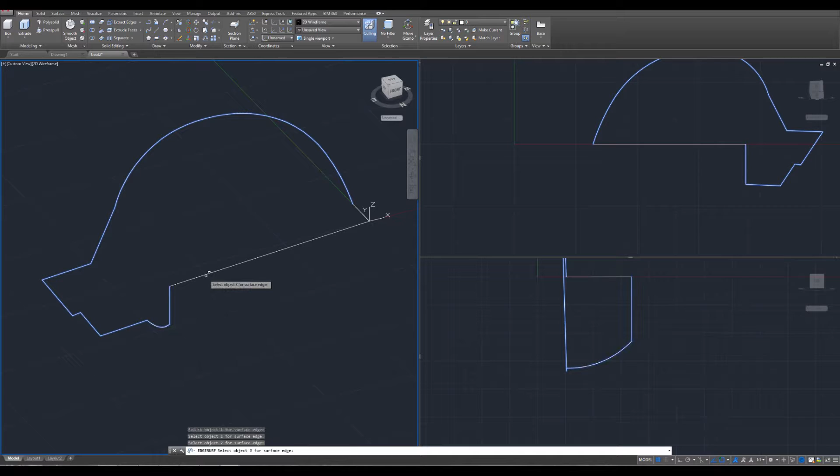We're going to use the edge surf command. And I'm not expecting it to work the first time, but let's go ahead and see. 1, then our second line is that, our third line is this, and then our fourth line would be that.

Wow. Okay, and I spoke too soon. There you go. You can see what it did. It pretty much wrapped a blanket over that surface, and that's looking pretty cool right now. So let's go ahead and see if we can mirror that.

Okay, and to use the mirror command, simply head over to your right view. We're going to need some kind of reference line, so I'm going to use the line tool, line, enter, and draw in a line from the top of it, a relative top to it, to the bottom. And then I'm just going to kind of continue it just a little bit using that reference so you can kind of see where the midpoint is.

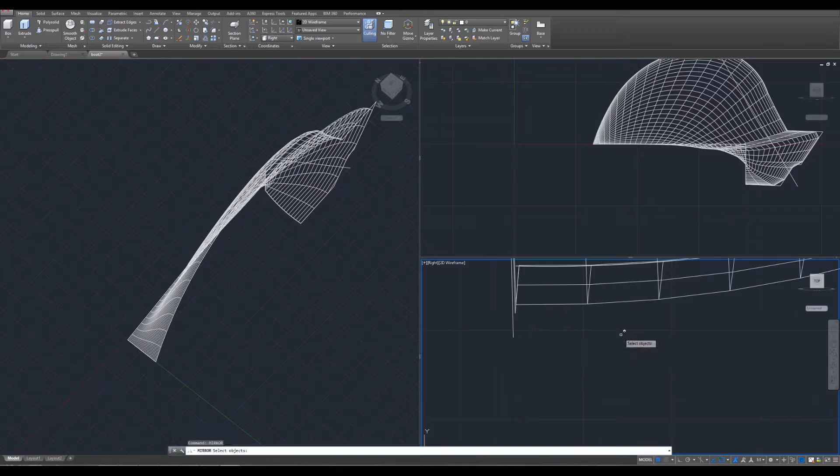Then I'm going to use the mirror command, enter, select this, enter, and then use this line as my reference. So I clicked on the bottom. Now I'm going to click on the top, like that. And I'm not going to erase the original.

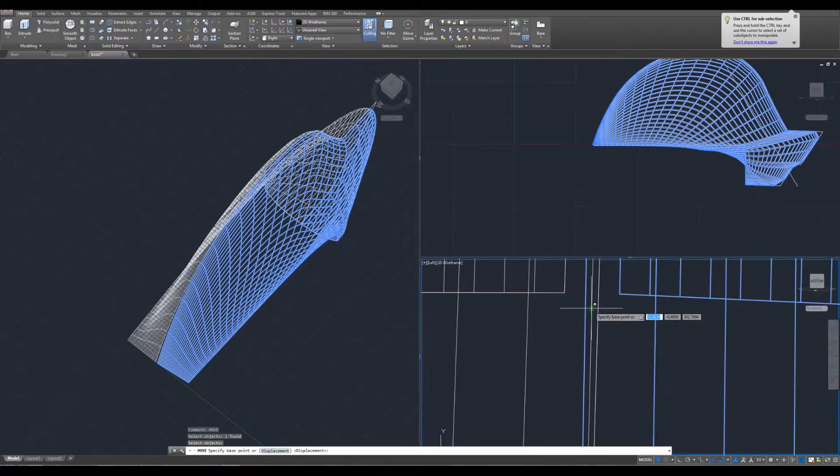And there we go. We can see how it looks. It does kind of look like there's a little bit of a gap to it, which is totally fine. I'm just going to look straight at it like that. Then I'm going to use the move command, enter, select this object, enter, and then I'm going to grab it from this point and move it over to that point. Okay, so I just moved it into place.

Now that's looking good. And let's go ahead and turn on the rest of the hull and take a look. Cool. Awesome. The only thing I notice is that there's a slightly larger gap on this side versus that side.

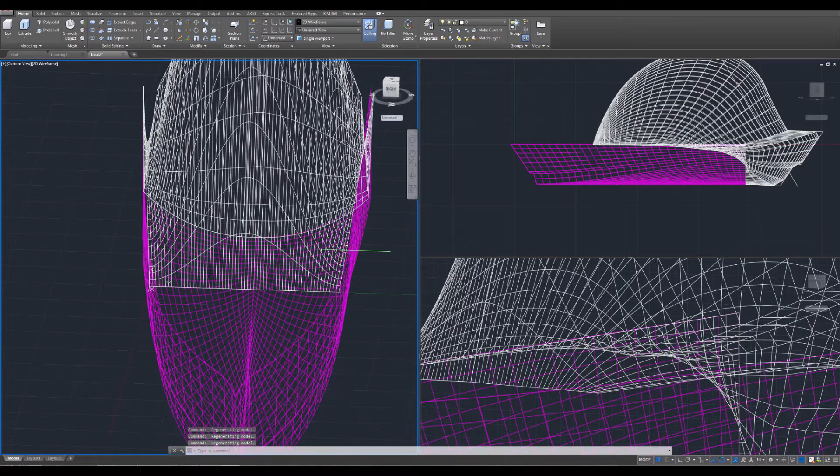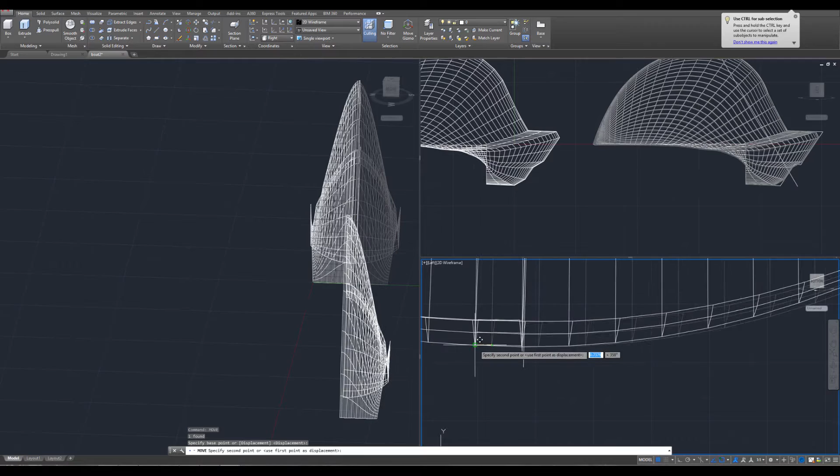So, if that is something that's bothering you and you want to change, just turn off the hull, go over to this view once again so that you're facing right at it, and then find something you can use as a reference. So I'm going to select that, use the move command, enter, and then I'm going to select that point and move it over to that point, or move it closer so that it matches up the way you want it to match up. And then turn it back on, see how it looks, and move on, so on and so forth.

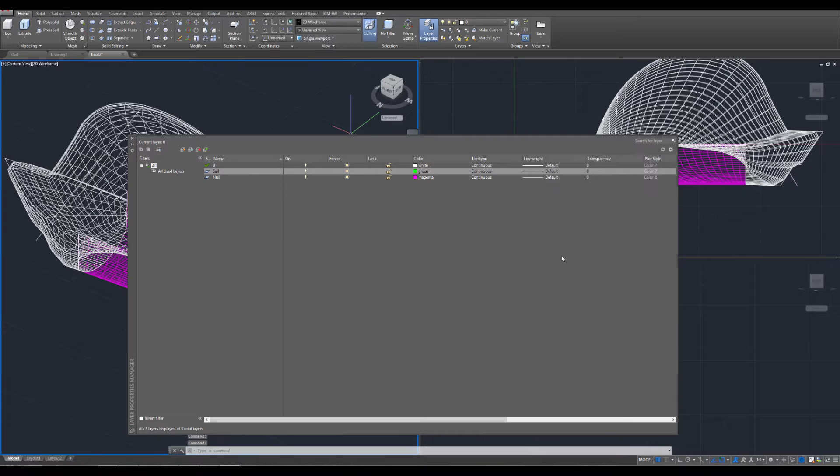Okay, and the last thing we need to do is add in the top deck of our boat. So let's go ahead and do that. First, let's create a new layer by heading to Layer Properties, right-clicking on this open space, New Layer, and let's just call this Sail. That will be the top part of the boat. I'm going to change the color to a light green, press OK, and then close out of that, select that, and switch that over to the sail part. So it looks like that.

Once that's been selected, go ahead and turn it off, because if we're just drawing the top deck of the boat, we don't really need to see the sail at that moment. And let's also grab the XYZ, hover over the center, switch it back to world view, and once it's on world view, click on it again and move it over to the center of the boat, like that.

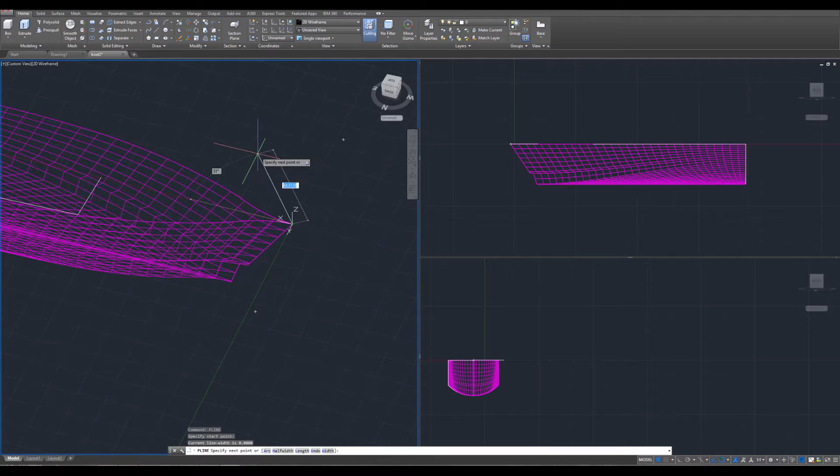Okay, that's looking good. Let's go ahead and do this. We need to draw out half of the boat. We're going to use the polyline tool, P-line, press enter, and then start by clicking on the top of the boat. I'm going to look at it from a top-down view, right-click, go to arc, right-click, go to second point.

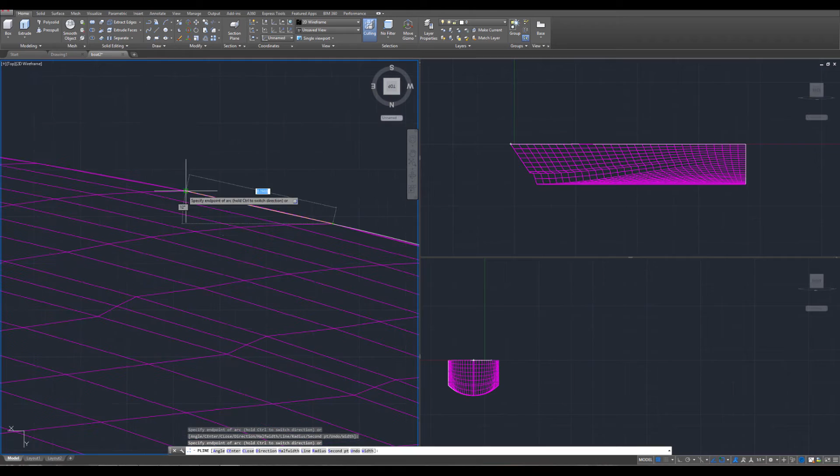Now the closer you are to hitting each of these vertices, the more smooth the shape of the boat's going to be. So you can see I'm kind of hitting every single one. It's up to you if you want to go through the entire thing or stop at a given point. I'm just going to make sure at least I have the top portion of the boat done.

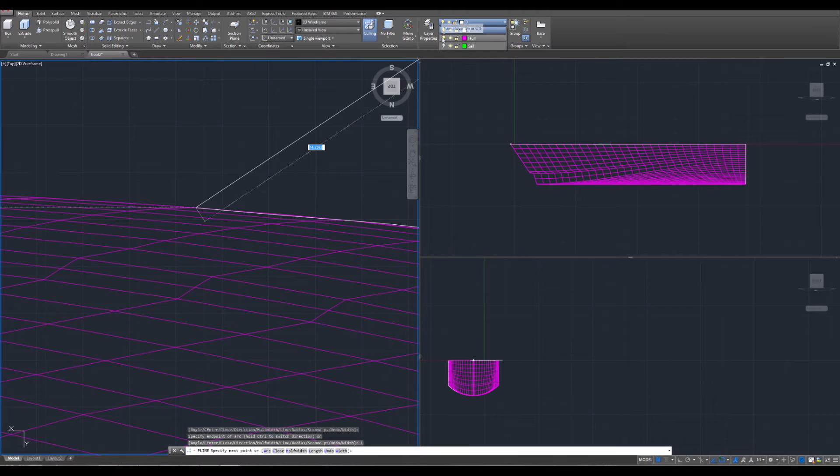Okay, so I'll probably get one more at this point, right about there. And then I'm going to right click, switch over to the polyline tool. I'm also going to turn off the hull layer, because in reality, we don't need it right now. We just need to see this part.

And you can also kind of see those were probably some remnant lines. Not a big deal, we'll get rid of those in a second. But I'm going to hover to the center point to get that tracking. And actually, I'm going to turn on ortho mode as well, so that actually helps out a significant amount.

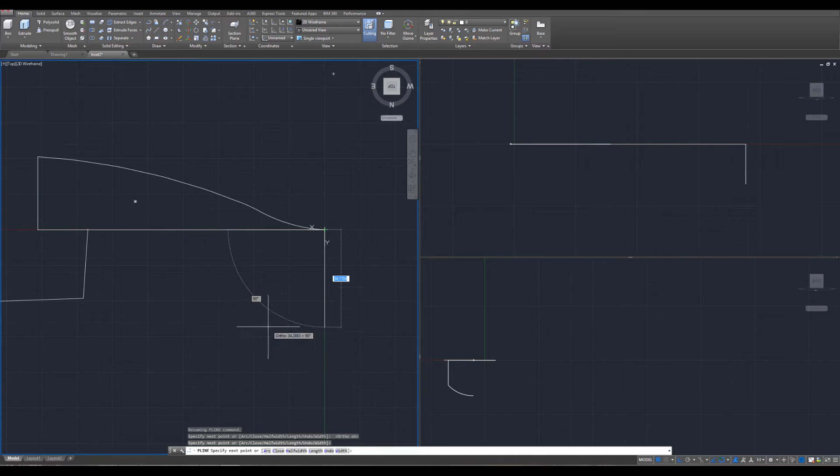Okay, so one right there, and then one right there. Okay, so we drew that out. We're going to press escape a few times and delete these lines that are no longer needed. And because it's a polyline, we're going to have to add in 3 breaks.

So I'm going to type in break, enter, and let's start with this one. I'll just click there, it doesn't really matter where, but click at, enter. Then I'm going to press enter again to activate break. Click on that one, press at, press enter. So there's a break there, and I'm going to press enter one more time to activate the break. Select that line, press at on the keyboard, and press enter.

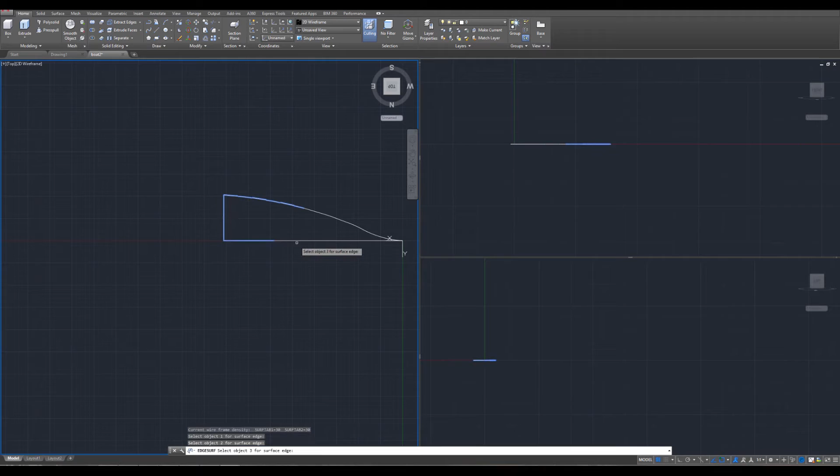Okay, so we should have 4 lines. I'm going to use the edge surf command one last time, and I'm going to select my 4 lines, 1, 2, 3, and 4. And if you did it correctly, it should create the mesh. If it's too detailed for you, you're more than welcome to reduce the SURFTAB variables so that you have less of a meshy substance.

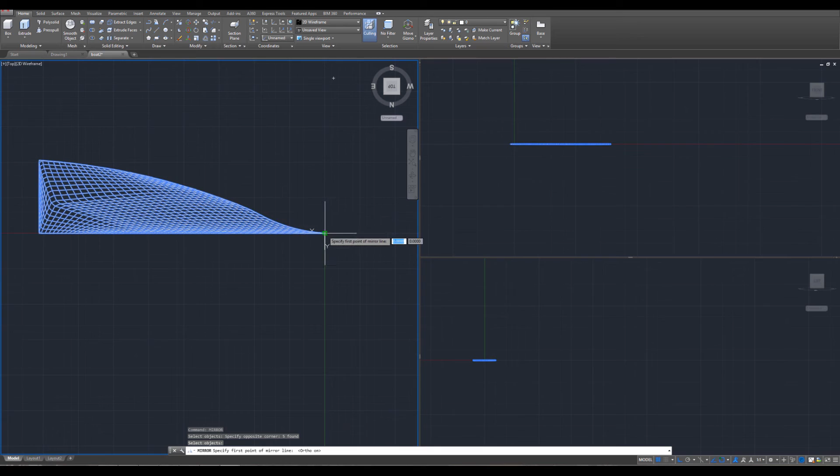And then let's go ahead and mirror this. Mirror, click that, select the object, enter, and then I'm going to turn on ortho mode and draw that out just like that. And no... So there we go. Let's add one last layer.

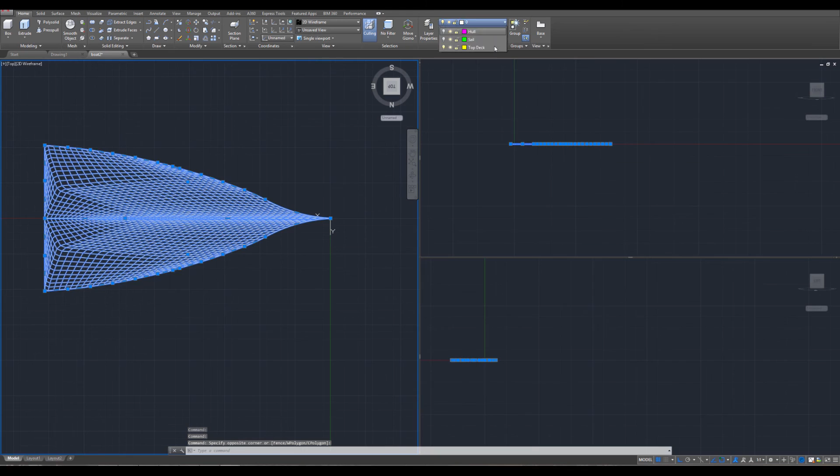Right click, new layer, call this top deck, and give it a color. Let's go ahead and say yellow. Close out of this, select that, and turn it over to the top deck.

Okay, lastly, let's head over to a single view. So go to viewport configuration, switch back to single, and now let's turn everything on to take a look at the final product.

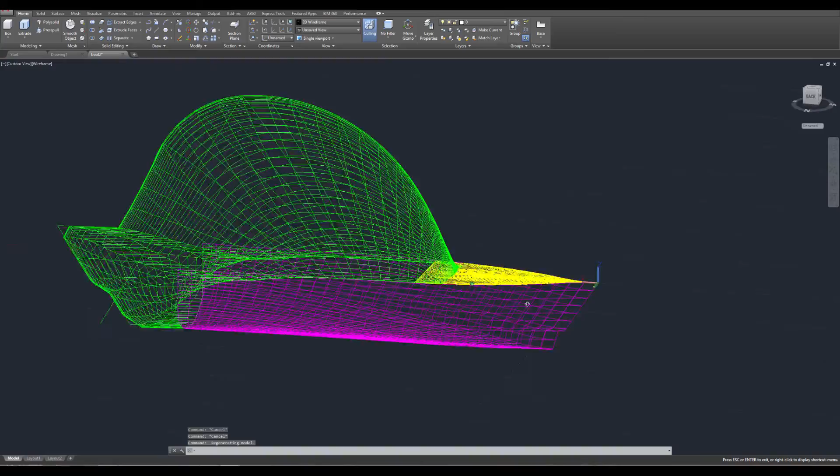Not bad, not bad, but there you go. We designed a yacht, or whatever you want to call it, but it's kind of like a boat. So, obviously there's some things you could go around and patch up if you like, but it's pretty good for a first attempt with 3D meshes.